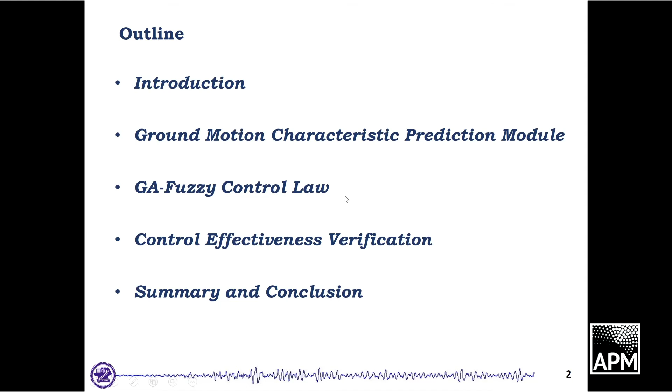Another issue we always face in Taiwan is that we are famous for high-tech industry, especially semiconductors. This industry and these factories are vulnerable to earthquakes too. If these devices or this industry is largely impacted by earthquake, the whole economy of the country may also be damaged. Recently in Taiwan there's a very hot issue called earthquake early warning.

I want to especially mention that earthquake early warning is not for prediction. The idea is that once the earthquake happens, as the wave propagates to your building, there may be a 10 second, 20 second, or even 30 second time lag, and we try to warn you before the major wave strikes. That's called earthquake early warning. In this study, we try to utilize this concept and combine it with structure control.

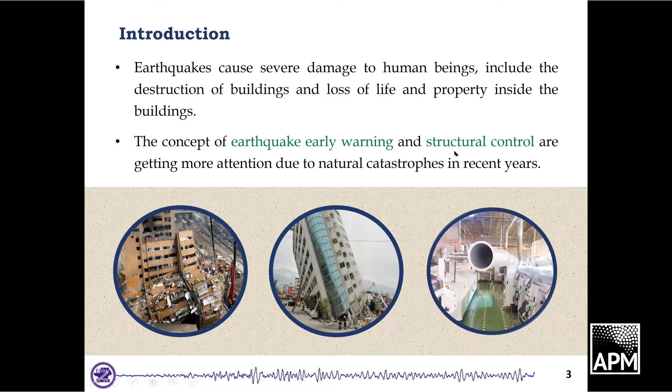I want to talk about structure control first. Structure control could be mainly divided into three categories: active control, semi-active control, and passive control. You can imagine the most popular one is passive control, which includes what we call viscous dampers, steel dampers, or bracing - these are all passive devices. But these devices can only provide up to maybe 50% reduction, meaning it's very economic but the performance is not that great.

If we want very high performance, we should choose active control, operated by hydraulic actuators. But there's another problem - these devices or systems may not be very reliable, and they may even destroy your building before the earthquake. So in the last decades, people started to develop a system called semi-active control, and we are going to use this concept and develop a semi-active control system that merits the advantages of both active control and passive control.

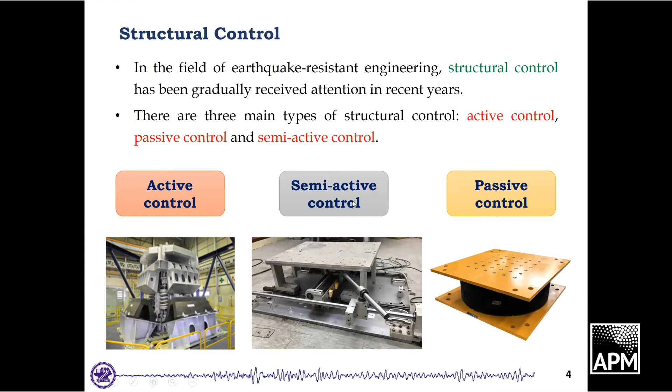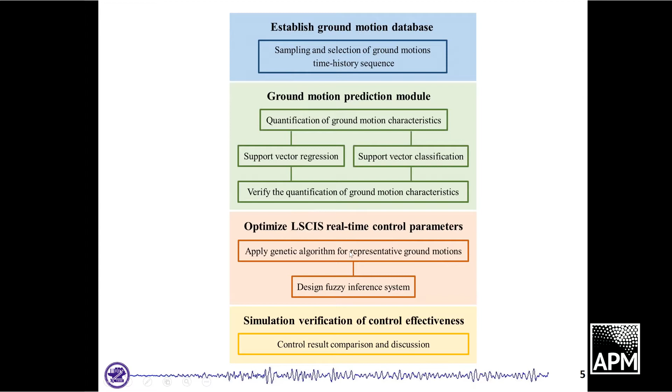This is the flowchart of this study. In the first part, we try to collect as many ground motion databases from the world as possible, because we want to demonstrate the concept of big data. Second, we utilize this data to develop the ground motion prediction module, which is trained based on a branch of artificial intelligence called support vector machine or support vector regression classification. If we can predict the characteristic of the ground motion correctly, we can use this to develop the control law. The platform or hardware we are going to utilize is called LSCIS - I'll introduce it later - and finally we'll do some numerical simulation.

Let's first talk about the ground motion characteristic prediction module. As I mentioned, we try to collect as many databases as possible, as many earthquake time histories as possible. We found a good candidate: the Pacific Earthquake Engineering Research Center, which we call PEER, in the United States. They have collected a lot of database, and importantly, they already classify them as near fault earthquake or far field earthquake, because these two categories have totally different characteristics.

In this database, we chose 132 sets of ground motion, including 78 sets of near fault earthquake and 54 sets of far field earthquake. You may have a question - why is the number only 132, why is that so small?

Because as I mentioned, if you want to do earthquake early warning, one very important issue is you need the vertical direction time history. That's why this issue has been important for only the last maybe 20 years. So when we want to collect the vertical direction measurement, we can only have 132, but comparatively, this is a big number already.

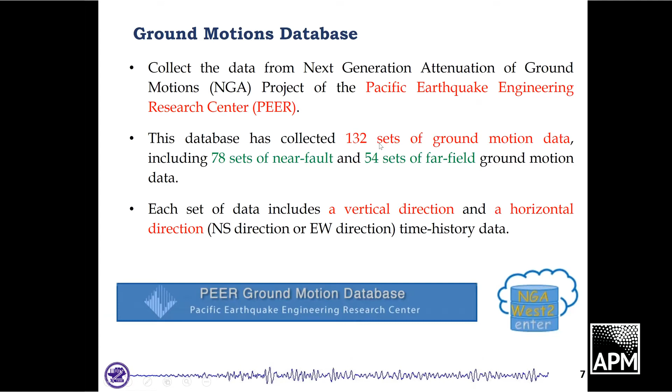And then we do some literature review. Scholars say if you want to make your database diverse, you want to increase its diversity, you need to especially care about some characteristics. That's on-site geological condition, distance between station and epicenter, fault rupture mechanisms, rupture directivity effect, and so on. So these six concepts or factors were mentioned by the scholar, but we want to quantize that one.

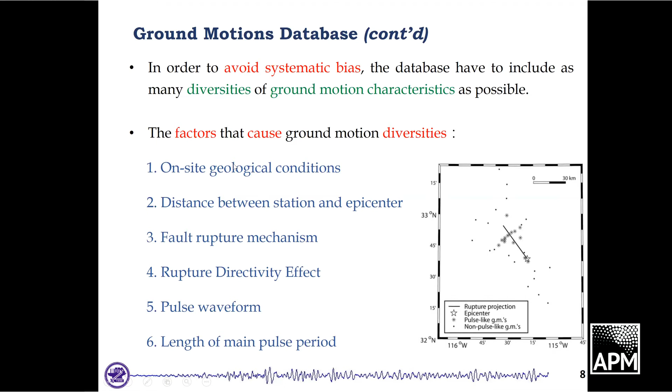So it needs to be described by indicators, or we say parameters. Based on the system or the earthquake early warning system we developed in Taiwan, now we use 6 indicators to predict the intensity, to get a PGA value, the peak ground acceleration value, by 6 indicators. I list that one in the first 6, and the detail I'll show you in the next slide. And we additionally add 2 parameters because, as I mentioned, we want to predict the characteristic of ground motion, not earthquake. So we add 2 additional parameters related to the energy of acceleration and the energy of velocity.

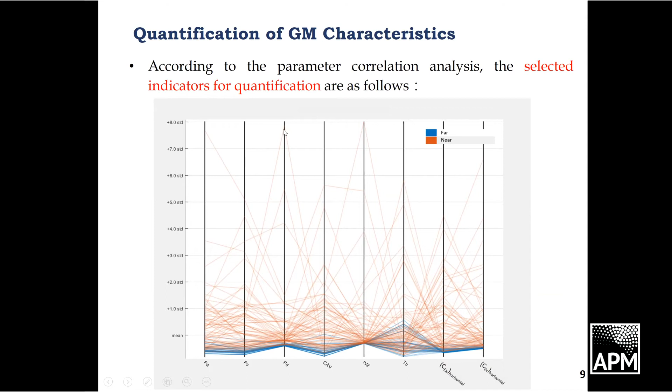Preliminary study shows that if that's a far field earthquake, the value would be relatively small. If that's a near fault earthquake, then the value would be very large. This diagram shows that it's possible to develop a ground motion characteristic prediction module based on the 8 indicators we selected. And this is the list of the 8 parameters: the peak measurement of ground acceleration, peak measurement of ground velocity, peak measurement of ground displacement, effective predominant period, and integral of square velocity.

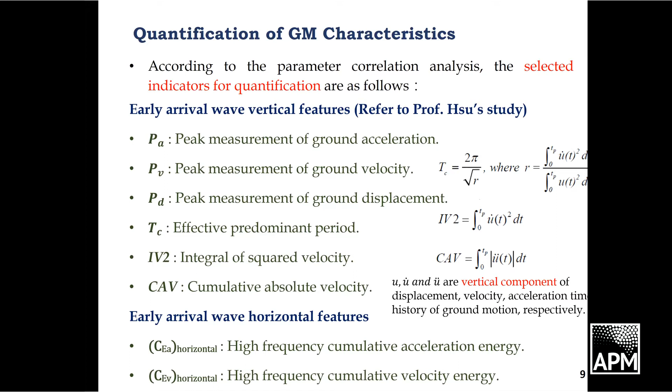One thing we need to be very careful is these parameters are calculated only from the first 3 seconds of the earthquake, not the whole time history. Based on the 3-second early arrival wave, we should be able to predict if that's a near fault or far field earthquake.

Then we define the outcome. Here, we need to separate the result of near fault and far field earthquake, so we propose this equation. XIN is the average value we have for near fault earthquake, and XIF is the average value we calculate from the database for far field earthquake. This equation could enlarge the difference for near fault earthquake. If that's a near fault earthquake, by using this equation, then that could be enlarged extremely to a very high value.

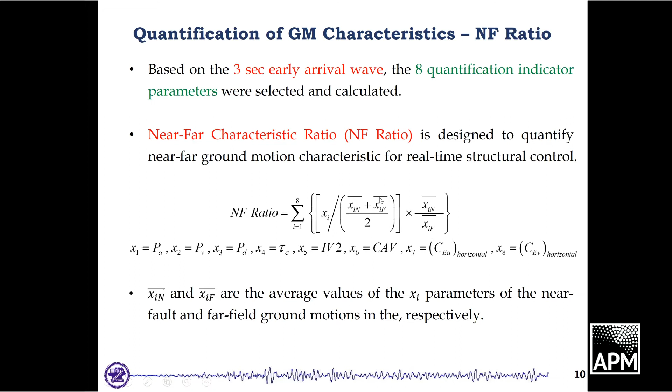That's what we call an NF ratio. So for the database, we select 75% of the sample as training sample and 25% as testing sample. The input parameters are the 8 indicators I just mentioned, and the output is the NF ratio we define. The output would be 3, 2, 1, 0, -1, -2, -3 for 7 levels.

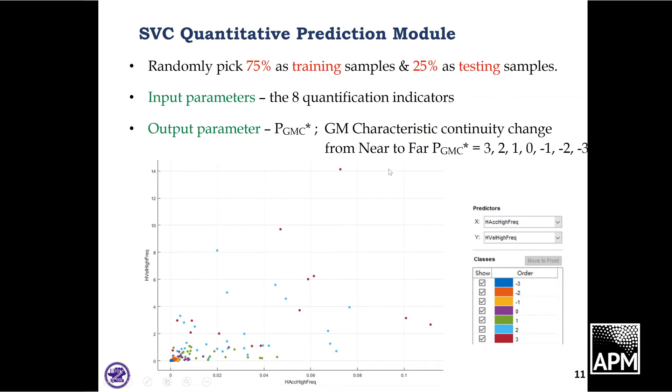So by using this, we should be easily able to identify if that's a near fault or far field earthquake. This is the result, you can see the test result. We tried a lot of different support vectors, and the best structure for the support vector classification would be quadratic, and it could reach a very high accuracy, 91.7%. Shown in green color means it's 100% correct. If that's in pink color, means there's a slight error. This is a percentage — you can see in the diagonal direction, almost it's perfect, meaning the prediction module could identify if that's a near fault earthquake or far field earthquake.

But for some areas, they have a slight difference. Remember that the error would be plus or minus 1 level. Meaning that for this one, the original would be -2, but my result would be -1, only 1 level difference, not a huge error. So we think this high successful accuracy rate gives us strong support for us to develop the control system.

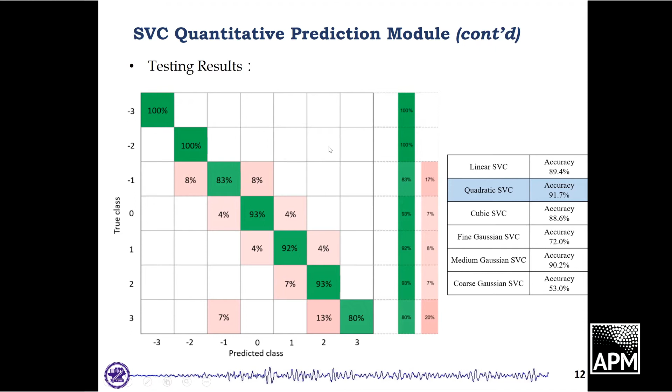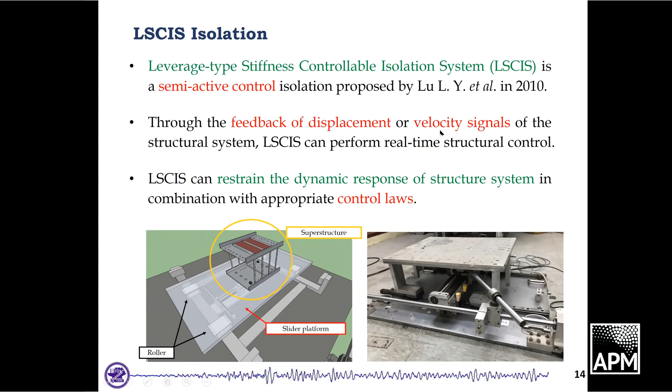And the third part, I'm going to talk about how we develop the system. That is the GA fuzzy control law. For the last 10 years, we cooperate with Professor Lu from National Cheng Kung University in Taiwan, and we propose the leverage type stiffness controllable isolation system, abbreviated as LSCIS. This structure, as you can see, is very easy to manipulate because it only has a very simple leverage mechanism. Second, it only needs a feedback of displacement and velocity — I only need to measure the displacement and velocity of the structure, then I could easily control its response. This slide shows you the idea or theory of the system. The green one is the pivot point.

It can move to the right-hand side and move to the left-hand side. If it moves to the right-hand side, then the leverage will be changed. The different lengths of this side and this side could control the stiffness of the system.

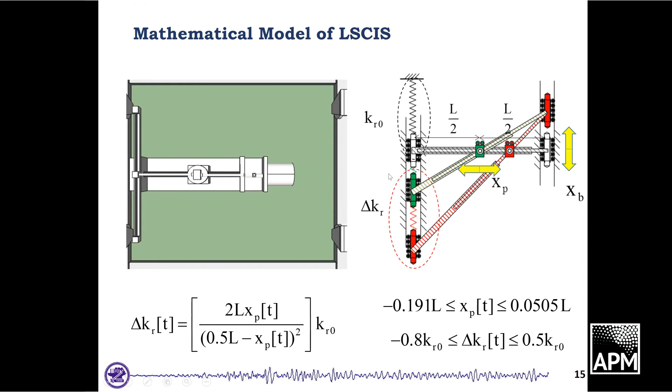You can see if the pivot point is moved to the right-hand side, it could increase the corresponding stiffness up to 50%. If it's moved to the left-hand side, to the minimum value, it could even reduce the stiffness to only 20% of its original stiffness, which means that during the time history of the earthquake, if I could properly switch the pivot point right-hand side or left-hand side, then I can control the response of the structure.

And in the last 10 years, of course, we gradually developed several systems. The first one is called LIEM. It cares about the kinetic energy only. And the second one is called minimum energy weighting system. It considers the kinetic and potential energy.

And recently, because we start to develop the earthquake early warning system, we propose a feed-forward predictive earthquake energy analysis, FPEEA system. This one could preliminarily detect the percentage of near-fault earthquake or far-field earthquake. But in this study, we try to improve the third one and propose a new one.

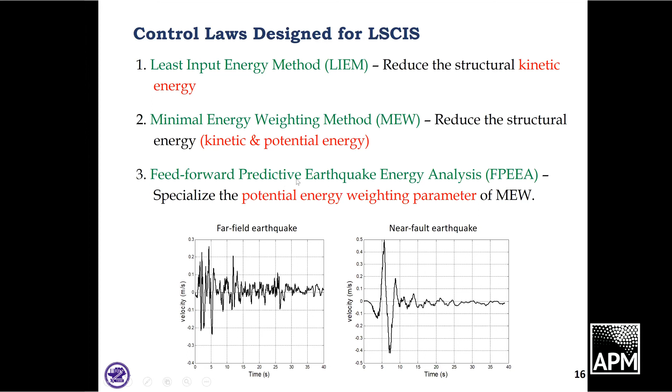And previous study shows that the potential energy is actually very important. So if you differentiate this criterion, you can calculate the optimum corresponding, or an optimal increment of stiffness, and you could switch the pivot point.

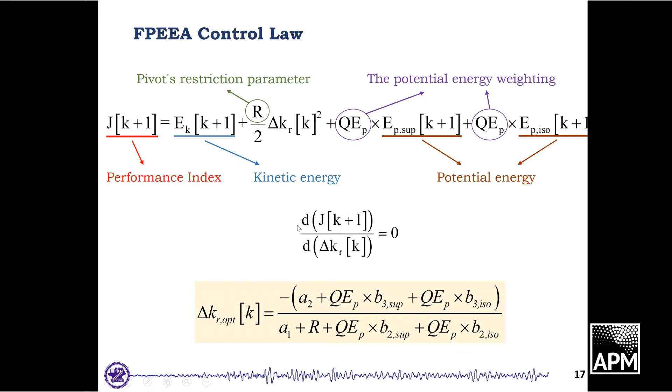But the version of FPEEA we propose is that we further divide the weighting of potential energy into two parts. One is contributed by near fault earthquake, and one is contributed by far field earthquake. So you can see the equation is slightly changed.

The result is that if you could identify the C1 value, which is related to near fault earthquake, then everything is solved. If the prediction is correct, then it could reach the optimal control performance.

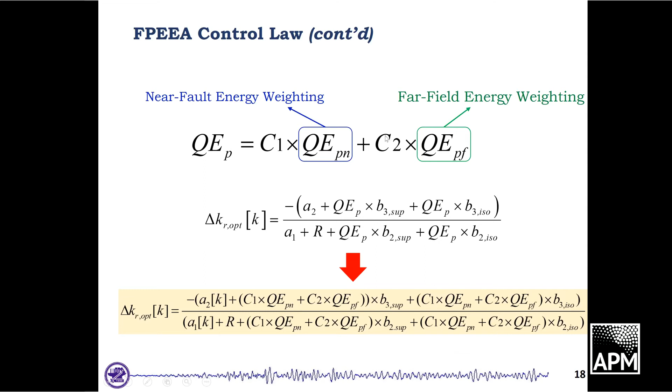Okay, so this is what we do. We try to connect the NF ratio we have and the PGA, peak ground acceleration we predicted, connecting these two parameters to the C1 value. And here we introduce a genetic algorithm for optimization.

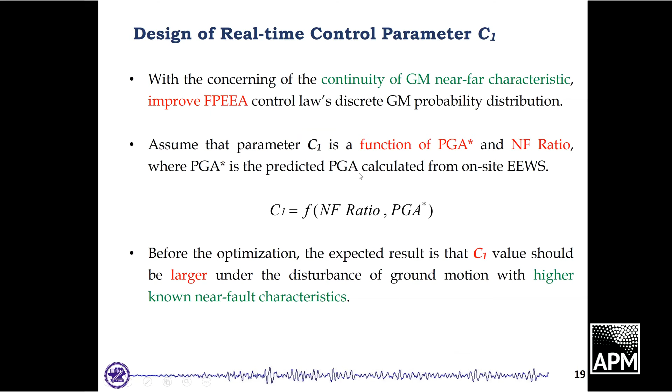The control target itself is used for the near fault earthquake, because we found through investigation it has a very large isolation displacement. So we need to focus on the isolation displacement, trying to suppress it most. And for far field earthquake, it has a very high response on superstructure acceleration, so for far field earthquake we should focus on these parameters.

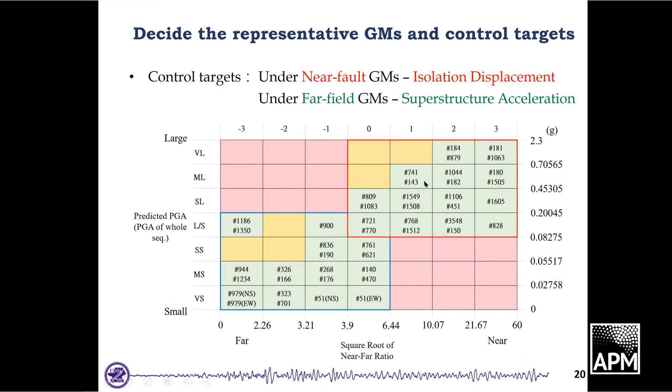These are the numbers, meaning what we have from the PEER database. We use a lot of different earthquake records and try to optimize its value, trying to find the optimum C1 value. And the optimization process was conducted by genetic algorithm.

These are some parameters we have for the genetic algorithm. The population size is 100 and the parent selection is roulette, for example.

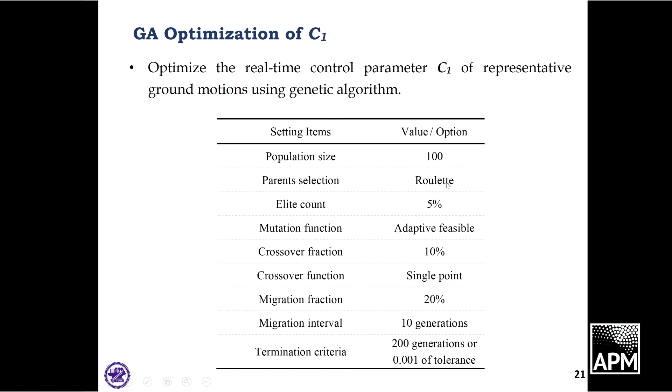And this is the process. You can see the fitness value decrease gradually, and when it becomes constant, it means the genetic optimization process is finished. And this is the result.

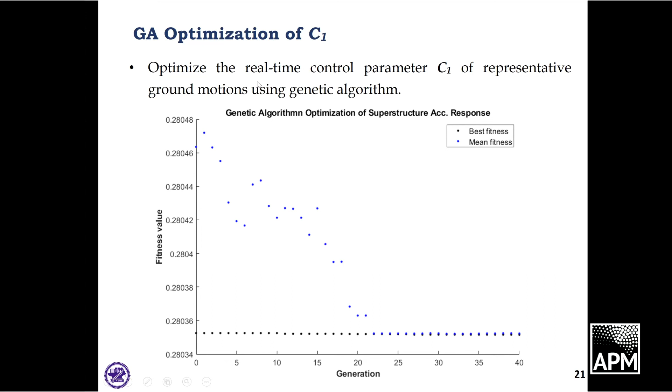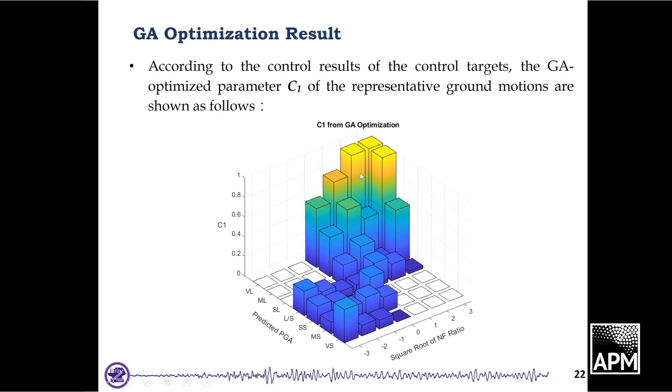Then we use a fuzzy inference system to smooth it. So everything is now smooth, meaning that no matter which value you have for the NF ratio, no matter which value you have for the predicted PGA value, you could easily indicate the corresponding C1 value.

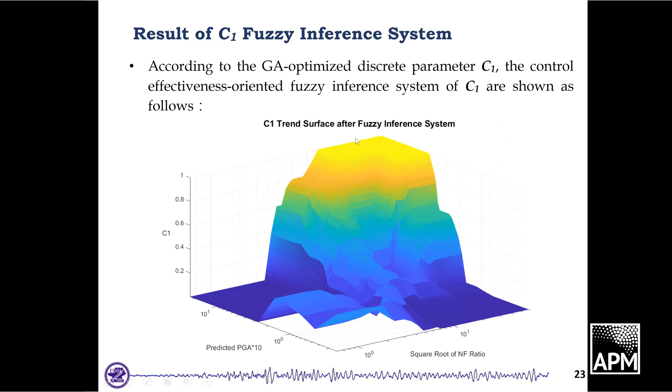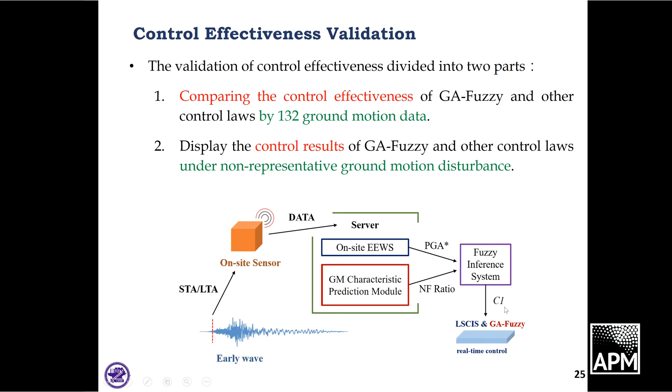Okay, now I'm going to show you the control effectiveness verification, to verify if the system could work in real life or not. Remember what I said: when there's an earthquake, the system is ignited and I predict the characteristic of the ground motion and decide the PGA value, NF ratio, and finally decide the C1 value and make the control to the structure.

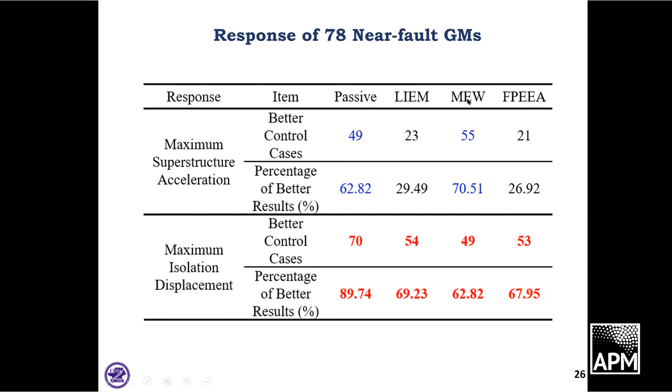We make an overall evaluation for the data we collected of near fault earthquake. You can see the proposed method, we call the GA fuzzy, has a very good result, especially for isolation displacement. It has a very high percentage of better result, meaning the proposed system could outperform passive, LIEM, MEW, and FPEEA.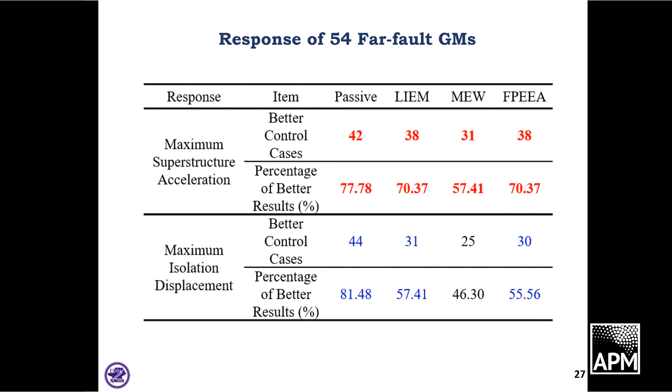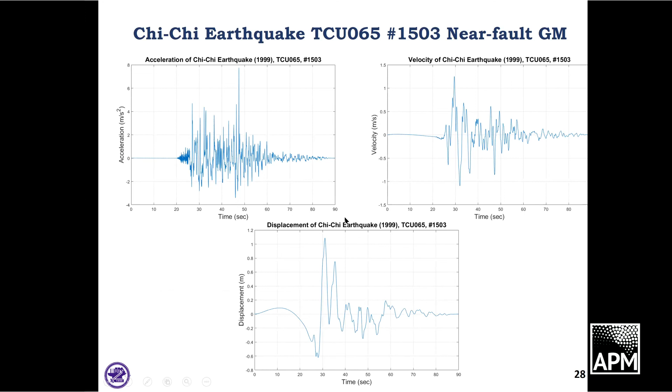Finally, I'm going to show you some time history for the comparison between the GA fuzzy system we proposed and FPEEA. This is a very famous earthquake in Taiwan, we call that TCU 065. I show you the acceleration, velocity, and displacement. So in general, I show you the maximum value.

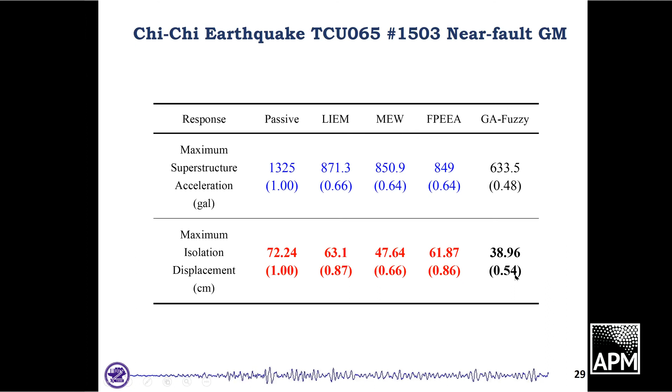You can see this is a near fault earthquake, so we care about the isolation displacement. If I introduce passive control, its control would be the benchmark, so the ratio is 1. The LIEM could reduce its ratio by 13%. MEW could reduce the ratio by 34%. And in our system, we can even suppress or alleviate it to 46%. That's a very high percentage.

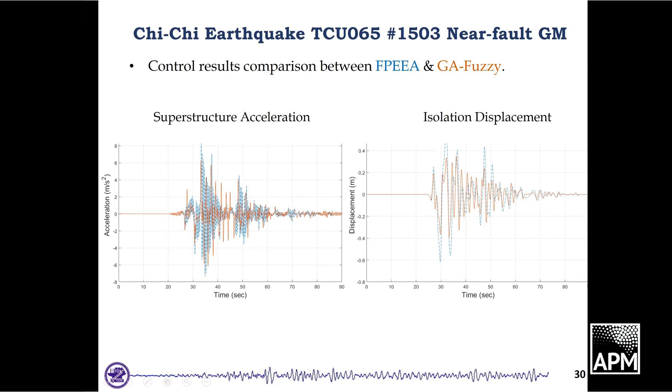And this is the time history. The acceleration of the superstructure could be suppressed effectively, and also the isolation displacement could also be suppressed significantly, because the blue one is FPEEA and the orange one is GA fuzzy, the system we proposed. And finally, this is the pivot point displacement, the movement of the pivot point, and this is the hysteresis loop reached by the two different systems.

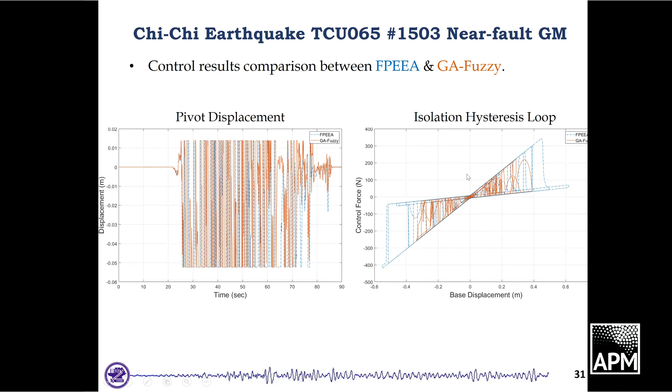Finally, I'm going to wrap up my presentation. You can see, first, we proposed a ground motion prediction module, and the proposed support vector classification could have a very high accuracy, up to 91%. Of course, the system could work in the first 3 seconds, then it will switch the control parameter for the LSCIS system promptly between near fault earthquake or far field earthquake.

And we utilize a lot of branches of artificial intelligence, including genetic algorithm, support vector classification, and fuzzy logic. Finally, the result shows us that the proposed system could outperform other control laws. In the next stage, we are now conducting the experiment at Jiao Tong University, and I hope we can verify that and show you in the next presentation. Thank you.

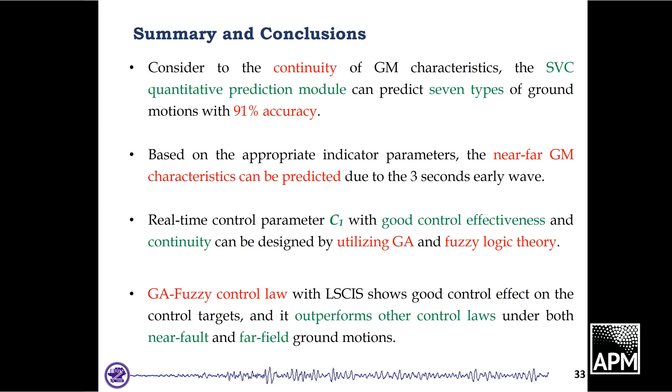Can I have? Yes, please, Professor Kuznetsov. Yes. Dear Professor Lin, thank you very much for an excellent presentation, and I have a couple of questions.

The first one, what is the average time discretization, say milliseconds or something else, needed to control systems, semi-active or active systems? What is your opinion? Can I ask it now? I mean the time discretization. Yes, I'll ask the question now. What is the average time discretization needed for active control systems or semi-active control systems to get information?

Yeah, thank you, Professor, this is a very good question. I think for active control, because it's controlled by hydraulic, so that could be milliseconds. And for the system we have, based on my experience, that could be 10 milliseconds, for semi-active control, because in our system the main consideration is we don't want to use a lot of energy to control the pivot point, so it cannot move very fast compared to active control. But I would say, like I mentioned, for the last 10 years we have developed different generations of the control system, and basically in the experimental verification it works pretty well, very close to numerical simulation. So I think the time we need for operation, or the time lag, doesn't affect the performance of the system seriously.